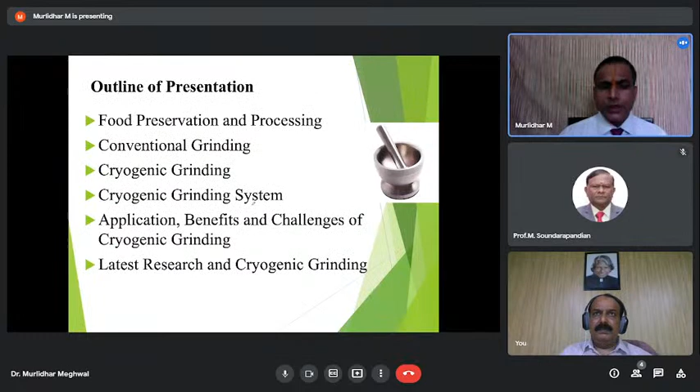So what is the purpose of processing? Why do we process food? One aspect of preservation is to extend the shelf life of food materials so that we can keep them for a longer time. Another aspect is to add value to the food materials, make them convenient, or make ready raw materials for making other food products. There are several processing methods: milling, grinding, mixing, separation, extraction, expression. All these are unit operations in food processing.

Here we will mainly discuss the milling process. Different terms are used for milling: grinding, comminution, size reduction. Grinding is a process of reducing the size of solid material by mechanical actions. We apply mechanical force so that bigger materials are brought to a smaller size, like grains: if we grind grains and produce atta or wheat flour, we can make chapati or other bakery products. So bigger materials are reduced by mechanical actions and divided into smaller particles.

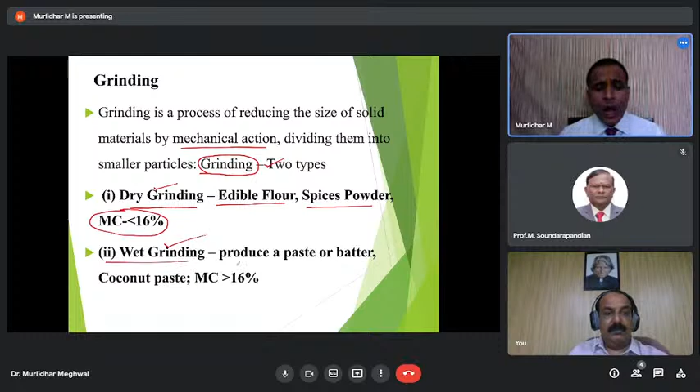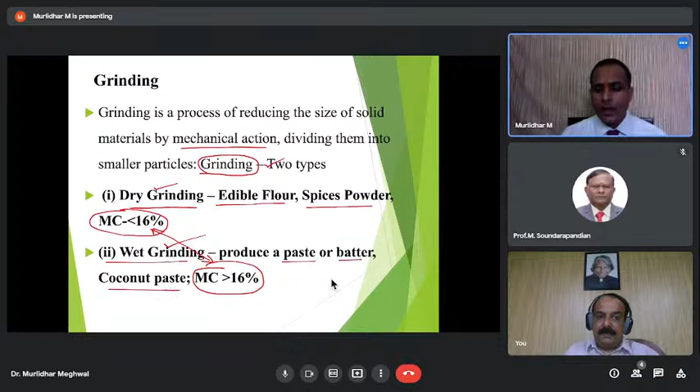The other is wet grinding. In wet grinding, the final product is in the form of paste or batter, and the moisture content is more than 16%. So the main criterion for classifying grinding is moisture content. If it is more than 16%, we call it wet grinding. The final product may be a paste or batter, like the coconut paste we use in South India for making dosa chutney.

Now, what is the application of grinding? Perhaps the most extensive application of grinding in the food industry is the milling of grains to make flour: wheat, ragi, bajra, or rice. These are staple foods consumed by the majority of people, so they need to be milled. So milling or grinding is a major sector in the food industry.

Apart from this, we use grinding in other sectors also, like grinding corn for manufacturing corn starch, or grinding sugar.

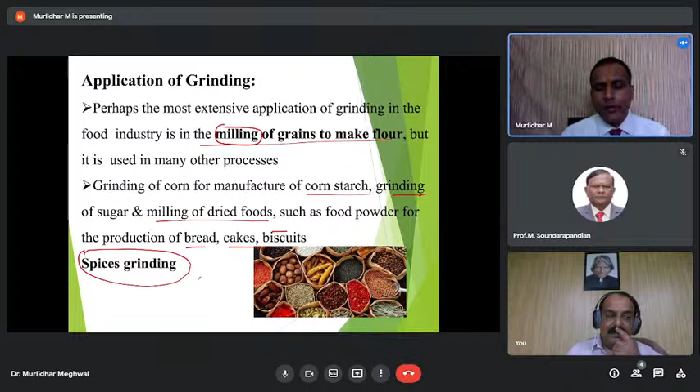Or milling of dried food, such as food powder for production of bread, cake, biscuits, like we use in the bakery industry. Now, spice grinding. This is a huge industry in our food processing. In our day-to-day life, in every home, we use spice in some form or other. So spice grinding is important.

Now, before moving further, for understanding spice grinding, first we'll try to understand the mechanism of grinding. We told the definition of grinding very easily, that we reduce the size of particles from bigger size to small size. But how is it happening? What is the mechanism? In grinding, size reduction is achieved by fracturing the materials. For fracturing materials, we need energy. So we apply force, energy, and with the help of that energy we do the size reduction.

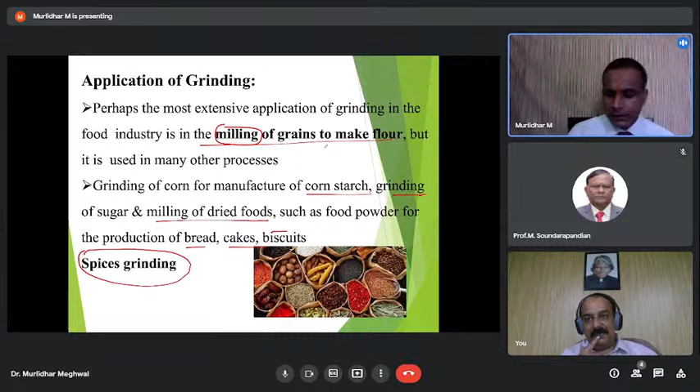You might have seen different grinders, maybe atta chakki. They apply a lot of energy, a lot of force. That is the reason there is a lot of heat generation. For efficient grinding, energy applied to the materials should exceed the threshold. When we apply the force, that force should be more than the maximum force the material can bear. When we cross that limit, we are able to fracture the materials, maybe by a small possible margin. The minimum energy needed to fracture the material, it should cross over that threshold.

When we apply the energy, material is stressed by the action of mechanical moving parts of the grinders. We will see different types of grinders, and then you can see how the different parts and structures do the grinding. Here, time plays an important part in the fracturing process. We have to give sufficient time for getting the required grinding done. This we will see in the hammer mill. The material keeps on rotating until it gets the required minimum size. Only then can it pass through the sieve.

This energy requirement is very important, because how much energy we are applying directly relates with economy and revenue. Our focus is to reduce the energy consumption, and it also relates with the quality of the material. If we apply a lot of energy, there is a lot of heat generation and more damage to the material. So it depends on the hardness of the materials. It also depends on the friability of the materials.

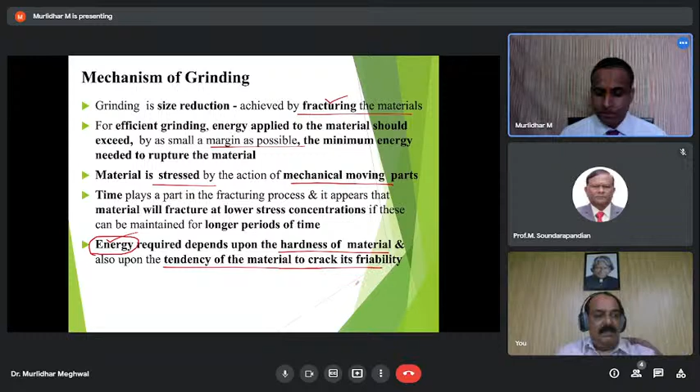Please. I think somebody's mic is on. Kindly mute.

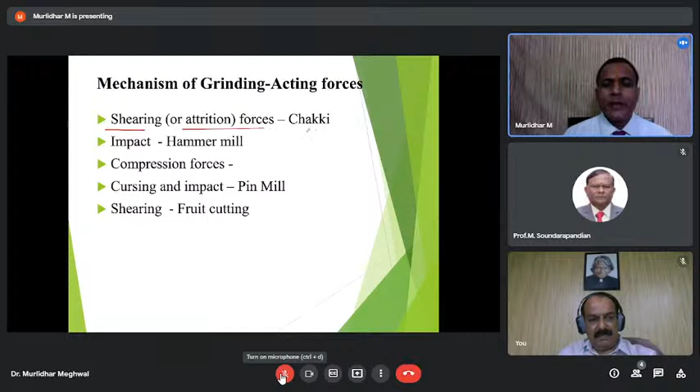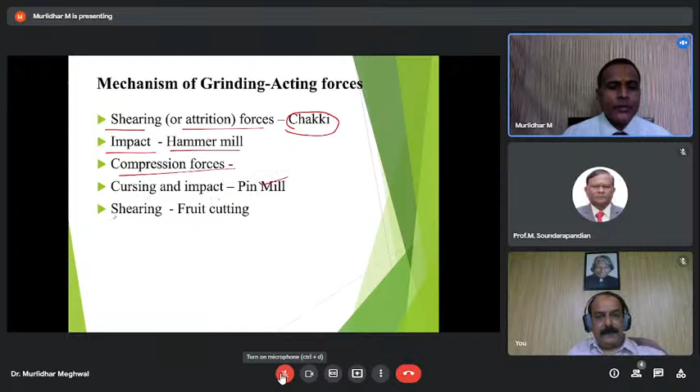So the mechanism of grinding we discuss based on the different types of forces acting on the material. These different forces may be shearing or attrition force, generally in the kind of grinder we traditionally use, the atta chakki. Then impact force, which is in the hammer mill. Then compression force, like when we cut fruits with the help of knives. Then crushing and impact force we find in the pin mill. Then shearing force again you can see in fruit cutting.

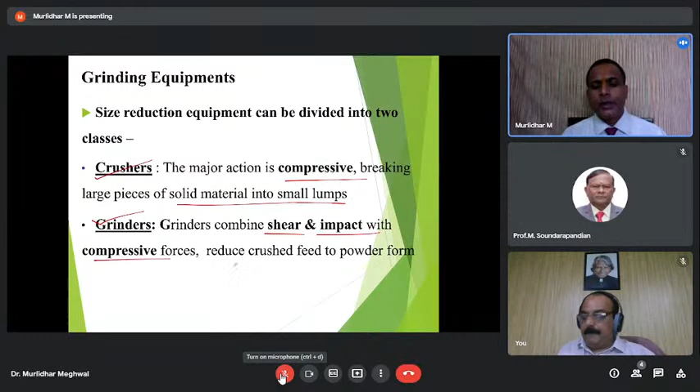Now, what are the different types of grinding equipment we need to get the desired size reduction? Size reduction equipment can be divided into two classes, because this size reduction process is used in other industries also, like mining or ore grinding. They have ores, big rocks, and they want to crush them, make powder, and then process further. The first type of size reduction equipment is crushers. The major action is compressive force, breaking large pieces of solid material into small lumps. The second category is grinders. Grinders use shear force and impact force, and compressive force is also there, and they reduce the feed materials into powder form.

This grinding process people have used since ancient times. We read in Srimad Bhagavatam, a very old ancient scripture, that Lord Krishna appeared on this earth 5,500 years ago. There a description comes that little Krishna, he is God, but he played the role of a human being. Like a normal child, he did a lot of mischievous activities, like breaking the pot and distributing butter to all the monkeys. So being a mother, Yashoda tried to teach him a moral lesson, and the description comes that Mother Yashoda tied Lord Krishna to a mortar and pestle.

It means that at that time also they used these kinds of devices for size reduction, for grinding. In other scriptures also there is a description of festivals like marriage, where ladies come together and grind the turmeric. So people have used this grinding process since ancient times. But with time, some challenges and problems came, and that we will be discussing here.

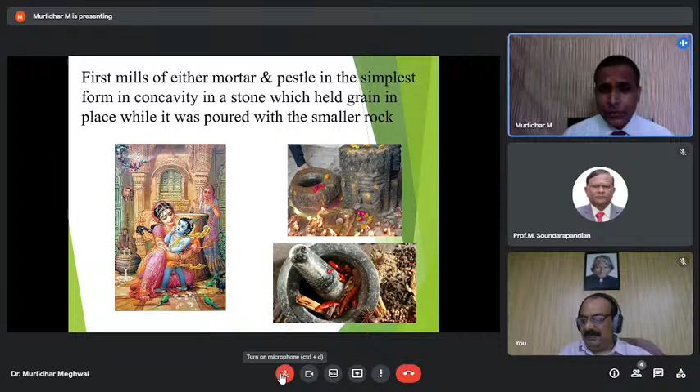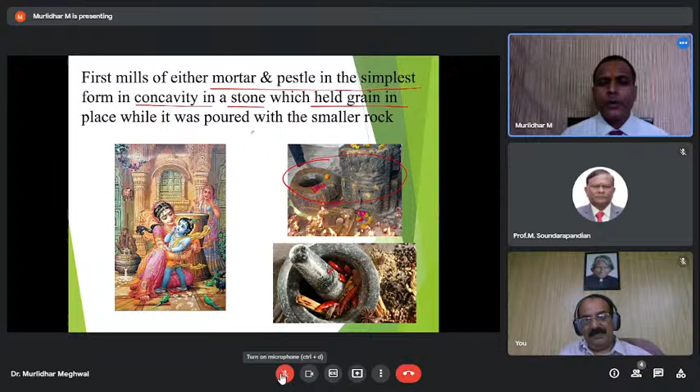So at first they used to use these kinds of mortar and pestle devices, which is the simplest one, which have a concavity in a stone, in which we can put the grains, and then we can do pounding with the help of these kinds of hammers.

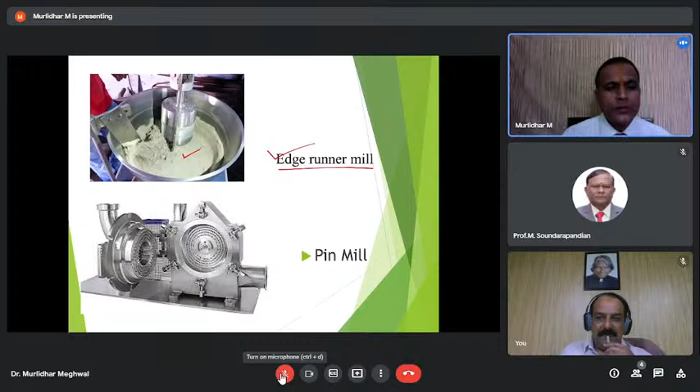Then pin mill. So here you can see this is a pin mill. So there are pins on both sides. One may be in a stationary condition, the other may be moving. And while moving with a lot of force, at high speed, they grind the materials with the help of impact force.

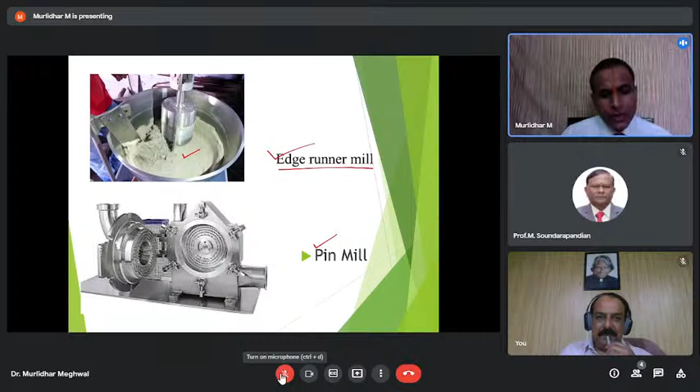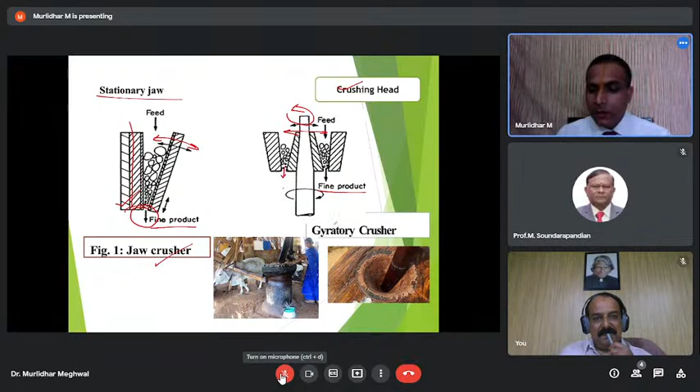Then comes gyratory crushers. So still now, if you go to the towns or village sites, people use this kind. Now they may use it with the help of electricity. Earlier they used bulls or animals, like they have coconuts and they crush it with the help of these kinds of gyratory crushers, and they get oil. So here you can see this coconut oil, and then they store it, and they use it throughout the year. So this is another kind of grinder.

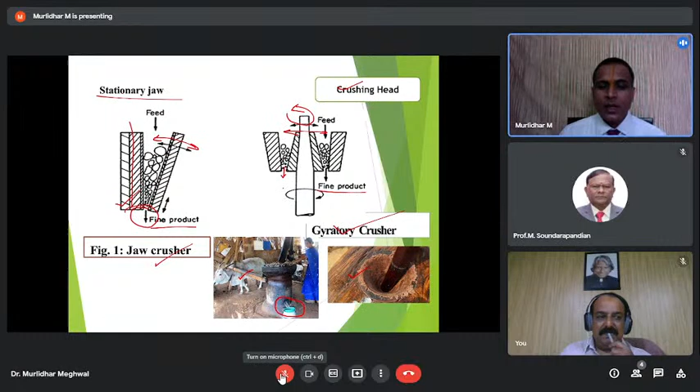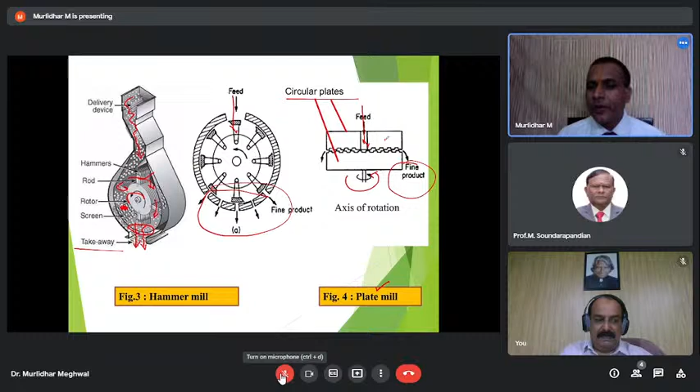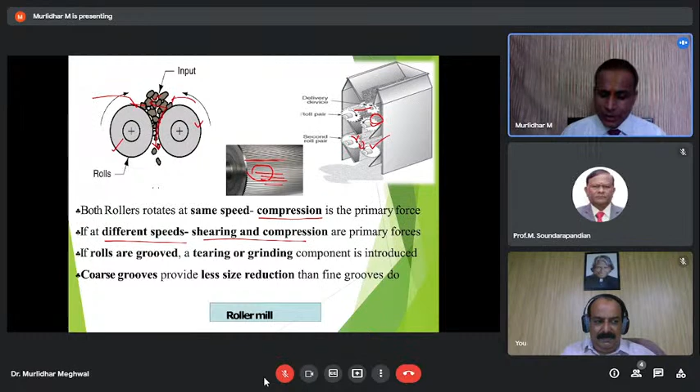If rolls are grooved, like this kind of structure, then tearing and grinding takes place. The coarse grooves provide less size reduction than finer grooves. So if these grooves are very fine, then we can get very fine powder. Here also you can see in starting bigger size grooves, and then it's coming to finer size grooves. So when we reduce the groove size, we get finer and finer size particles.

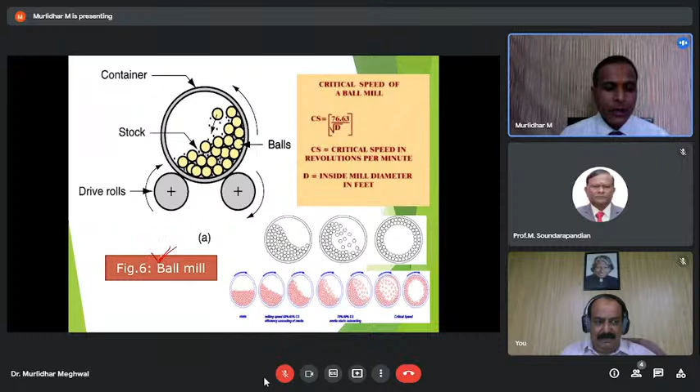Now we want to discuss the ball mill. We have discussed earlier that in grinders the ball mill also we use. So these are the driving rolls. This drives this mill, and we use stocks. So these are the stocks, or these are the balls. So these stock materials, maybe we want to do the size reduction, and outside we have a container in which we contain the materials, balls, everything.

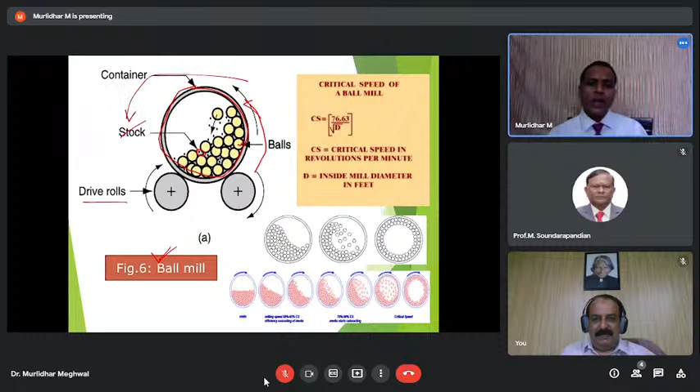Now when these driving rolls rotate, then this grinder starts rotating in this direction. When it rotates, these balls also rotate, and they rise up to a certain height, and then they fall down. So when they fall down on the materials with force, with impact and compression, they grind the materials. So these balls will do the size reduction.

Now, in this grinding process, when we increase the speed, if it reaches a particular speed, then we see these balls will also start rotating along with this container. So the first case is static conditions. Slowly we increase the speed, then the balls start rotating. Here they start falling, and we have increased speed more. So some balls are falling, some balls are rotating along, and in a particular condition, all the balls start rotating along with the grinder. No ball is falling. It means there is no grinding.

So this condition in which all balls start rotating along with the container, we call critical speed. So we have to avoid this critical speed, otherwise we will not get size reduction, and we will keep putting in energy and the grinder will be running. So we have to avoid this critical speed.

So to calculate critical speed, they have done the estimations, calculation, determination. So CS = 76.63 divided by the square root of d. This is the formula to calculate the critical speed. d is the inside mill diameter in feet. It's based on the diameter; accordingly, you have to set the speed. CS is critical speed in revolutions per minute. So we have to avoid this critical speed to get the size reduction.

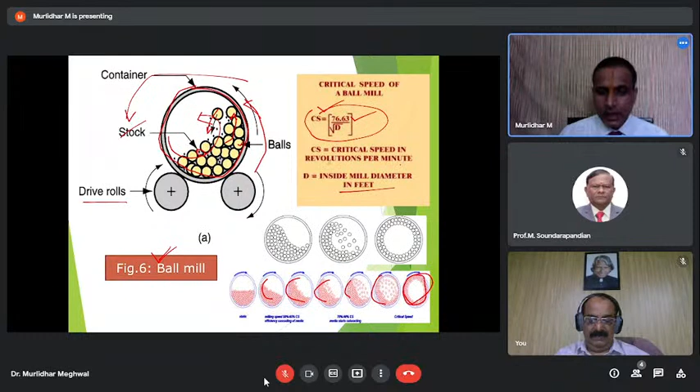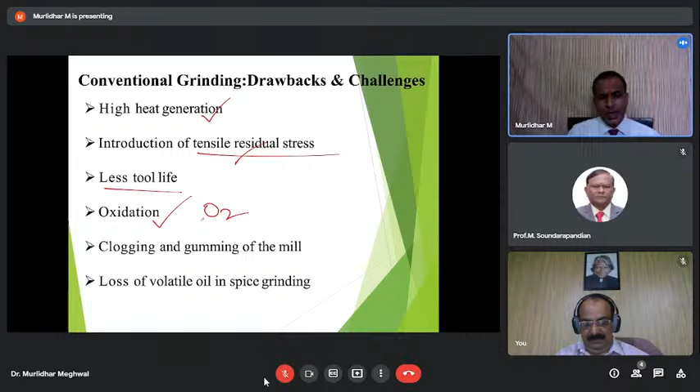Then oxidation. Gases like oxygen are in the atmosphere. When we do grinding, we break the materials and the constituents inside come out. They react with oxygen, and at high temperature, oxidation becomes faster. So this is another problem.

Then clogging and gumming of the mills. When we do grinding, some spices have a lot of oils. Particularly if we take ajwain, it has a lot of volatile oils, and when we try to grind, that oil comes out, and it generates a lot of heat. Due to heat generation, this oil will melt and clog the mills. Lot of oil generation, releasing, and then clogging the mills. Then we cannot do further grinding.

Then loss of volatile oil. Spices have phytochemicals, a lot of useful health-benefiting compounds, and due to this high heat generation, these useful compounds get deteriorated, oxidized, and lost. The spice or food commodity loses its value.

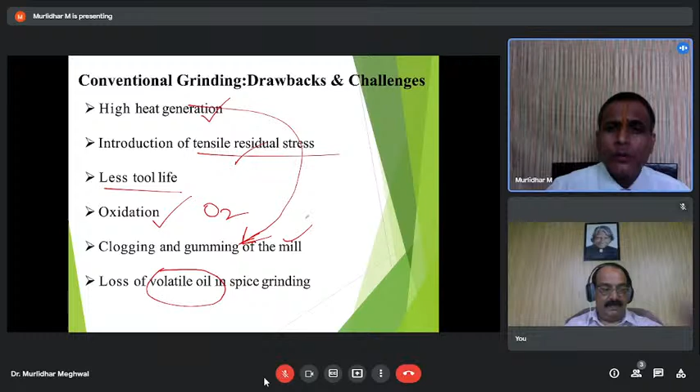So how to overcome this problem? These kinds of problems, as we discussed - high heat generation, tensile residual stress generation, less tool life, oxidation, clogging, gumming, volatile oil loss, discoloration, color also getting changed in the material - to overcome these problems, we come up with cryogenic grinding of spices.

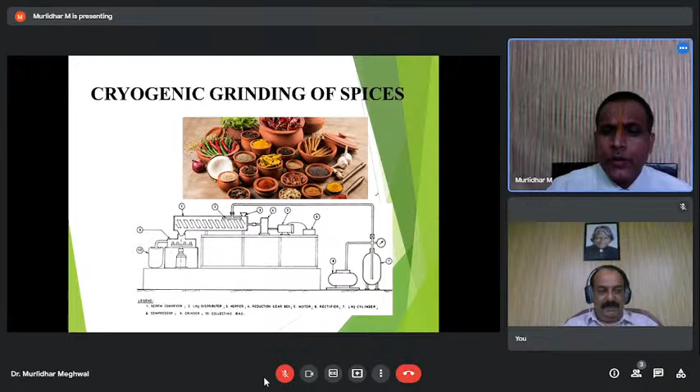This is the cryogenic grinding system developed by Professor Tridip Kumar Goswami at IIT Kharagpur and Dr. K.K. Singh, the director of CAE Bhopal. They have worked on it and developed this cryogenic grinding system. We will try to understand what the cryogenic grinding system is. Before that, we will discuss some fundamentals required to understand the cryogenic grinding process.

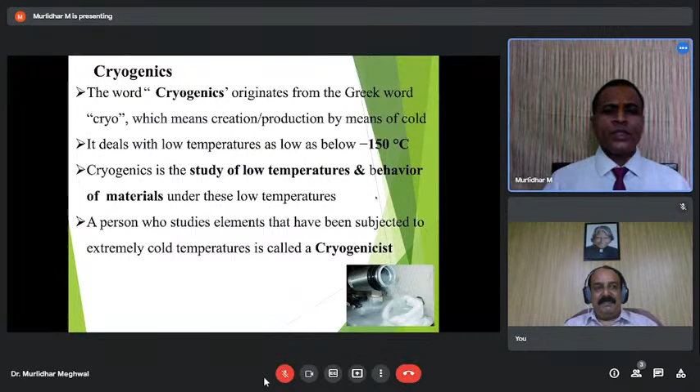First of all, this word cryogenics - what does it indicate? This word originates from the Greek word cryo, which means creation or production by means of cold. So these cryo words deal with cold. The cryogenic branch particularly deals with low temperature processes.

How low? It may be as low as minus 150 degrees Celsius or minus 196 degrees Celsius. Cryogenics is the study of low temperature and the behavior of materials under these low temperature conditions. Because we use this approach in several industries.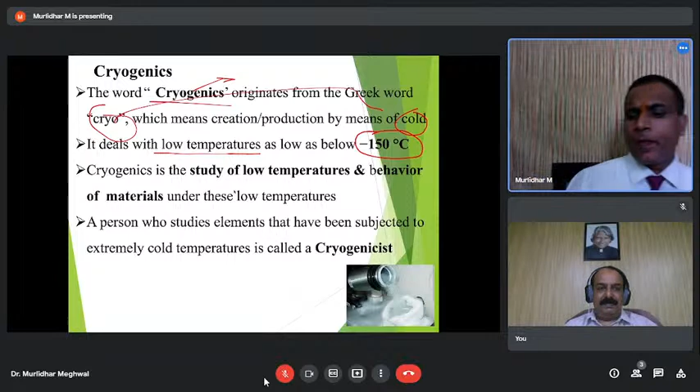For example, rubber industry, aerospace industry, similarly in the medical field. That is why it's very important, and we have separate departments for this science, this discipline. Like in IIT Kharagpur, we have a department of cryogenics. There are all kinds of processes we read about in detail.

A person who studies elements subjected to extremely cold temperature is called a cryogenicist. So the person who works in this field, who is an expert in this field, is a cryogenicist.

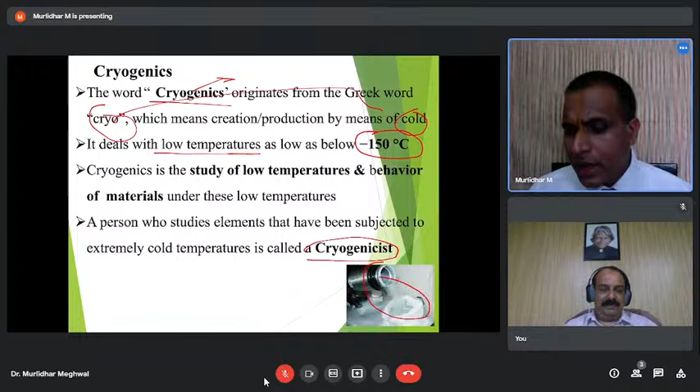This is liquid nitrogen. You can see it being poured on materials. We will be discussing here why we use nitrogen and why it is so important. There are several cryogenic liquids we can use - nitrogen is one of them. We can use helium, neon, argon, krypton, hydrogen, methane, or liquefied natural gas, or maybe more.

Here, most importantly, liquid nitrogen we use - commonly we use this one. Why do we use it? Because in nature, plenty of nitrogen is there. If we compare with helium, very less. If we start helium extraction, it will be very expensive, even though it is also an inert gas.

Now when we extract and try to store these kinds of gases, when we compress and extract it, it has a lot of vapor pressure. So the earlier scientists faced problems for storage. So they developed certain devices to store these kinds of liquids - we call it a Dewar Flask. The Dewar Flask has very good insulation, and different kinds of cryogens we can store in it.

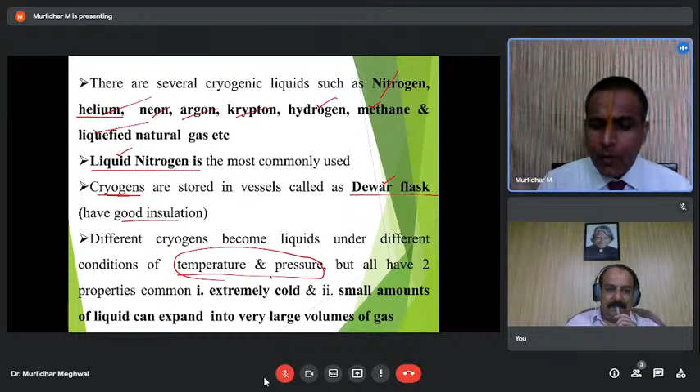It means if we try to compress them, extract them, they are very cold. But as soon as they get heat, they try to evaporate. They will try to occupy more and more space. And if we are not able to handle this properly, it may lead to a serious accident.

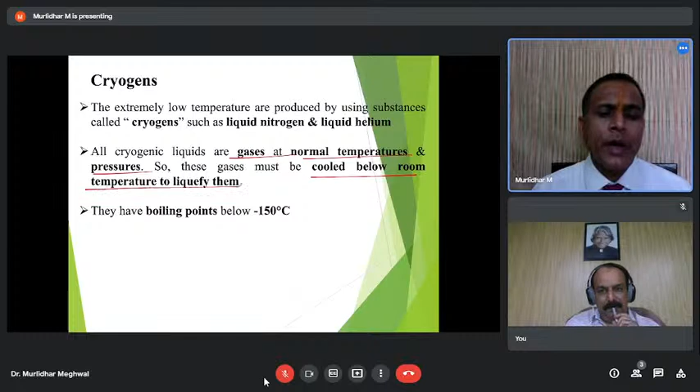The extremely low temperatures are produced by using substances called cryogens, such as liquid nitrogen and liquid helium. All these cryogenic liquids are gases at normal temperature and pressure, so they must be cooled below room temperature to liquefy, and then we can cool them further.

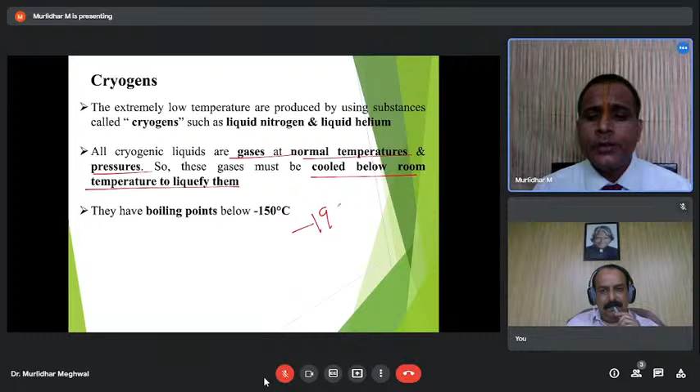Liquid nitrogen has a boiling point of minus 196 degrees Celsius, so you can imagine how cold we are bringing these materials to. Nitrogen gas makes up a major portion of our atmospheric gases, about 78.03% by volume. Another good thing with liquid nitrogen is that it is inert, colorless, odorless, non-corrosive, and non-flammable.

These properties help us use this gas in food. For example, it is colorless and inert, so if something used in food gave color, that would be a problem. It's odorless, so when we use liquid nitrogen for cryogenic systems, our interest is that it should not give any odor, because we want the food material to retain its own natural odor. It is also non-corrosive and non-flammable. These unique properties of nitrogen make it a very good candidate for use in food, cryogenic grinding, and food processing industry. Even beyond cryogenic grinding, liquid nitrogen is used for packaging purposes also.

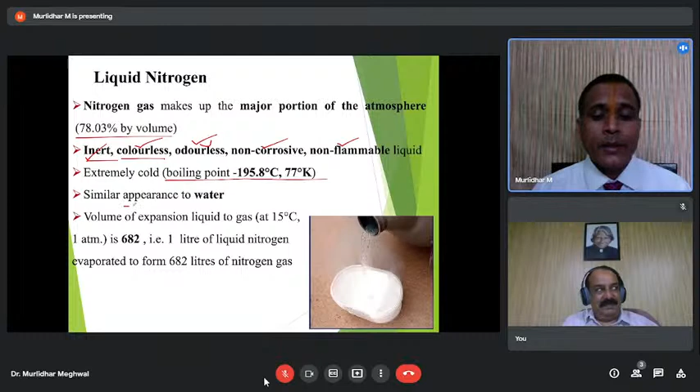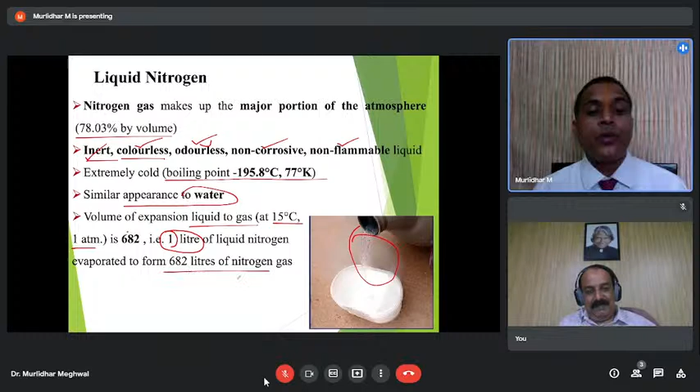This is extremely cold, with a boiling point of minus 195.8 degrees Celsius, and when cooled it appears just like water. Regarding the volume of expansion from liquid to gas, at 15 degrees Celsius and 1 atmospheric pressure, if we take 1 liter of liquid nitrogen, it expands into 682 liters of nitrogen gas. You can imagine how much volume it needs, which is why we need a very good container to store it.

It has very good insulation. They have developed a vacuum inside a vacuum, so there is no heat transfer by conduction or convection, and it has silver surfaces, which is why this container is quite expensive. It can be used for both hot or cold substances to store, since our basic idea is to avoid any kind of heat gain or heat loss.

So the liquid nitrogen or cryogen storage equipment was invented as the Dewar Flask. He was also the first man to liquefy hydrogen.

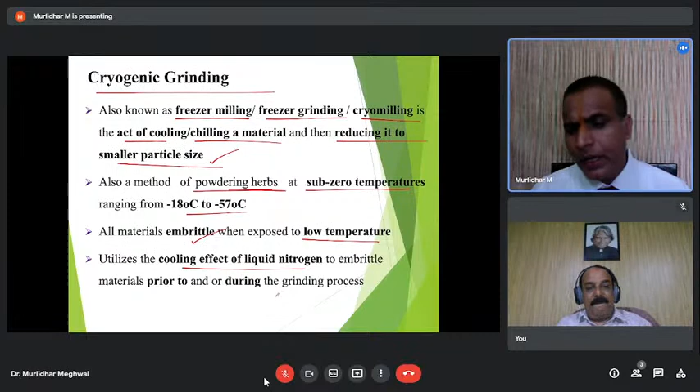It utilizes the cooling effect of liquid nitrogen to embrittle materials prior to and during grinding. Both processes can be done: pre-cooling or pre-chilling before grinding, or supplying liquid nitrogen during the grinding itself. A normal grinding process that does not use a cooling system can reach up to 93 degrees Celsius or 200 degrees Fahrenheit, a very high temperature. Such high temperature leads to reduction in volatile content and heat-sensitive constituents of the herbs and spices.

So to overcome these problems, we come with the cryogenic grinding process, which does not damage or alter the chemical composition of the plant materials. Materials which are elastic in nature, having low melting points, low combustion temperature, sensitive to oxygen - these kinds of material also we can easily grind in cryogenic grinding system.

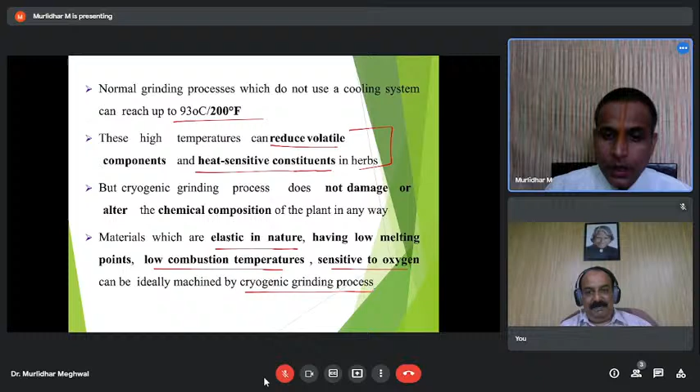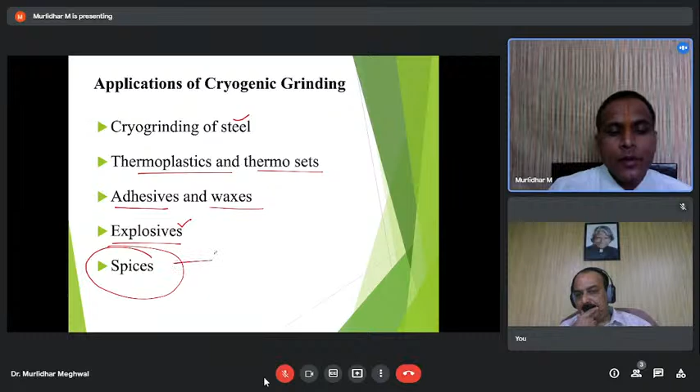There are several applications given in literature, and we can see different industries use this cryogenic grinding system. They use cryo grinding for steels in metal industry, thermoplastic and thermoset, in rubber industry, for adhesives and waxes, for explosives, in aerospace, and particular application in spice industry that leads to our food processing sectors, which we will be discussing.

Spices are most important constituents of our Indian food. All Indians like very spicy food. We use lot of spice. We are blessed by nature that we have so many different climatic conditions in India, and we produce a lot of spices.

Like in Rajasthan, Ajmer side, we are an arid zone, so lot of cumin, coriander. Whereas in Calicut, Kerala, very good condition for black pepper, turmeric growing. And if we go northeast, there is a lot of organic turmeric, lot of spices we produce.

So we use these spices not only in our house, we use in hotels, restaurants, and food processing industry. Not only that, we export a lot of spice. So in history also, from decades back, foreigners used to come for spice trade.

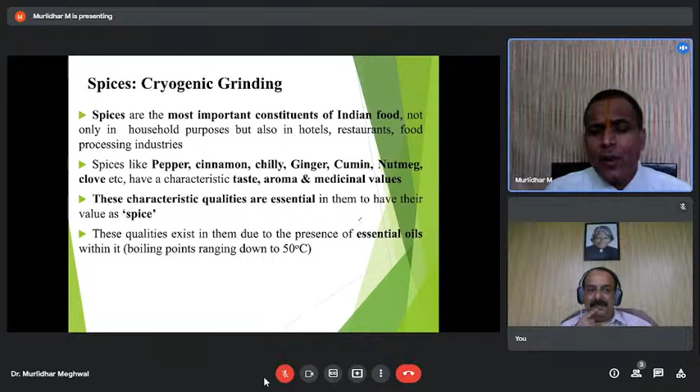The spices, particularly like pepper, cinnamon, chili, ginger, cumin, nutmeg, clove - they have characteristic taste and aroma, and they have medicinal value, very important.

So they give this taste and specific aroma to the food, then people like it, and they also give health benefits. That is the reason that in this corona situation, people at home use a lot of kada, and in that they use a lot of spices.

So these characteristic qualities are very important in terms of their spice values. These qualities are inherently present due to the essential oils or volatile oils, and these volatile oils get affected by the temperature when we go beyond 50 degrees Celsius.

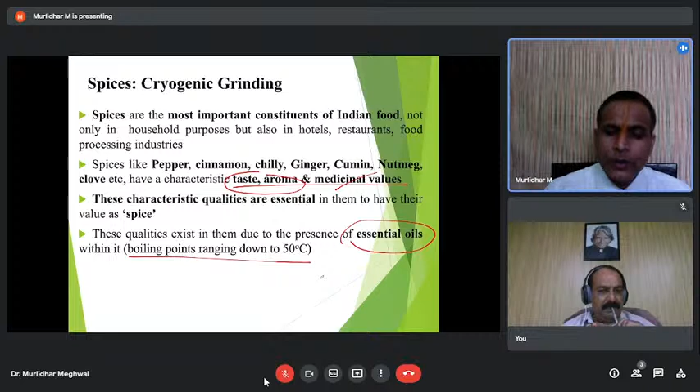As we already discussed some of the problems, again we are discussing some of the problems with our conventional grinding process. One is loss of essential oil or volatile oil due to high temperature.

This applied energy gets dissipated in the form of heat, and this produces more than 99% wastage. Whatever application of heat energy we do, energy goes as waste in the form of heat, noise, friction. Only a very small amount we actually use, other goes as waste.

The temperature in the grinding zone rises more than 90 degrees Celsius, and this is the reason for loss of essential oils, whose boiling point is near 50 degrees Celsius, and this leads to inferior quality of ground products. It reduces the quality of the product.

Then clogging and gumming of the mills. Some of the spices discussed like nutmeg, cloves, cinnamon, ajwain contain high levels of fats, and when we grind it at high temperature, it releases its oil so that clogs the mills.

Some of the spices like capsicum, chili have high moisture content, so that also can lead to the clogging or gumming problem. Due to this clogging and gumming, one is the problem in operation, and the other problem is that it affects the quality of our products.

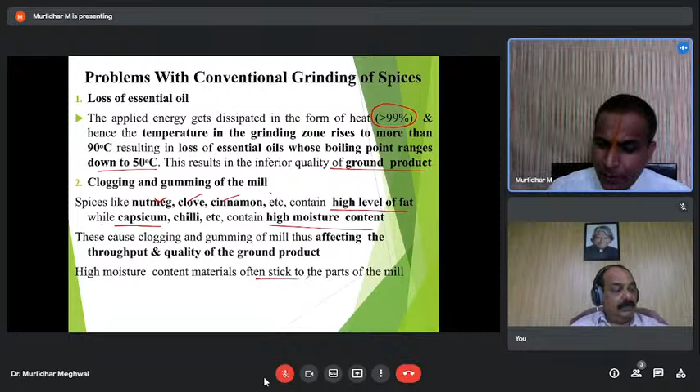So these high oil content materials or high moisture content materials will stick to the parts of the grinder when we use the conventional method. Oxidation and related degradation is another problem due to this intimate cyclone effect of the air in the vicinity of the grinding zone. These aromatic substances in the material oxidize and lead to rancidity, oxidative rancidity.

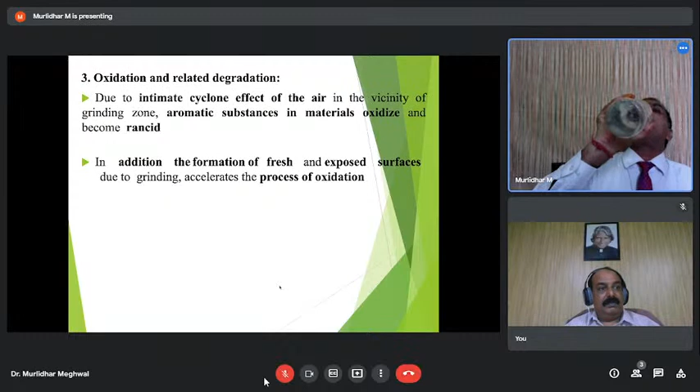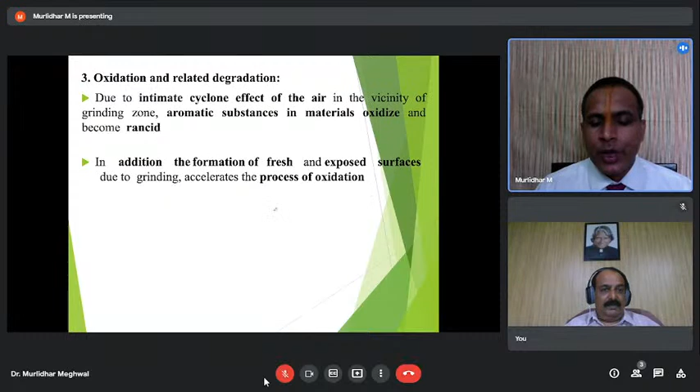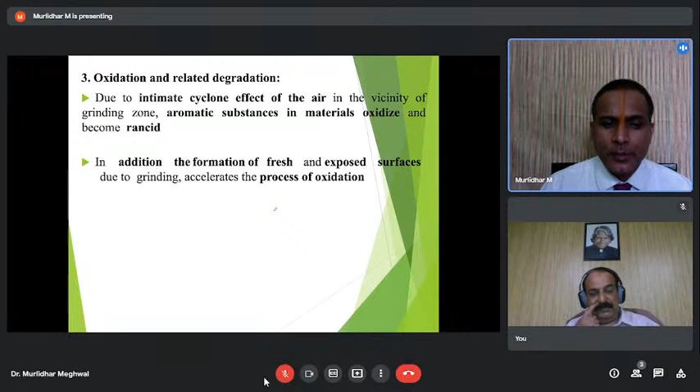Other reason is fresh and exposed surfaces. So when we do the grinding, we increase the surface area of the materials. Because of size reduction, surface area gets increased and more surface gets exposed to oxidation. So the oxidation process becomes more.

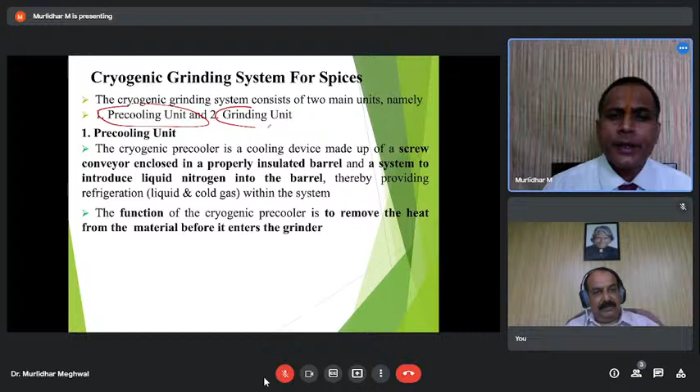Now, to overcome this problem, this cryogenic grinding system for spice we are discussing now. So the cryogenic grinding system consists of mainly two units. First is pre-cooling unit, which is before grinding cooling, and the other is the grinding unit, which we use during the grinding.

So, in the pre-cooler there is a device which has an arrangement of a screw conveyor enclosed in properly insulated barrels. You will see it in the grinder system, and it has a system to introduce liquid nitrogen into the barrel. So we will find an opening like this, from where we can apply the liquid nitrogen, and then it will have that spiral moving thing, so it will take the materials to the grinding zones.

So when we apply this liquid nitrogen, it gives the refrigeration, the chilling and cooling effect to the system. The function of the cryogenic pre-cooler is to remove the heat from the materials before they go into the grinders. So it consists of this screw conveyor assembly as we discussed, and it also has an air compressor. This liquid nitrogen Dewar system is attached to that, and then it has this power transmission arrangement, and then control panels to reduce the temperature of the seed below its brittle point.

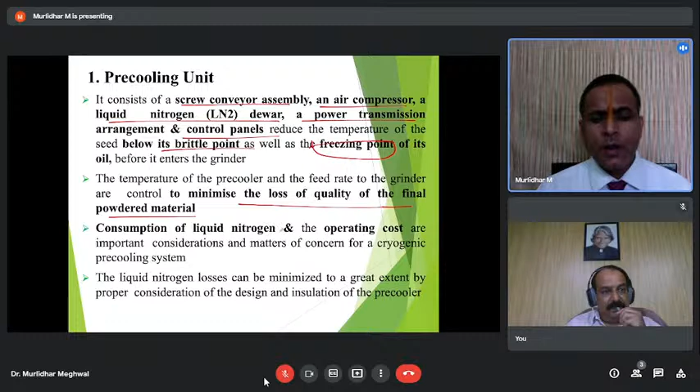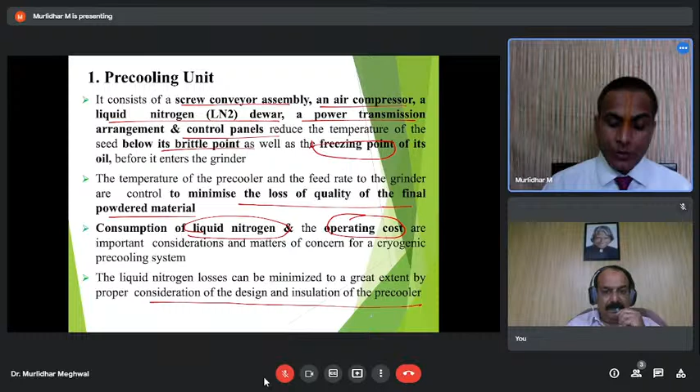Consumption of liquid nitrogen and operating cost are important considerations because this liquid nitrogen is expensive, and for operation we need energy, that's also expensive. The liquid nitrogen losses can be minimized to a great extent by proper consideration of the design and insulation of the pre-coolers. So we should design properly so that the minimum loss of the materials is there.

So there are different engineering considerations we have to take into account for the development of these kinds of grinders. First is retention time: how much time we need to keep the materials in the grinder. We have to optimize it. Then appropriate insulation. Grinders should have appropriate insulation so that they will not lose heat to the surrounding ambient conditions. Then dismantling and cleaning should be easier. We should be able to easily open it and clean it. Then cool-down losses should be reduced by keeping the machine size and structural components to a minimum.

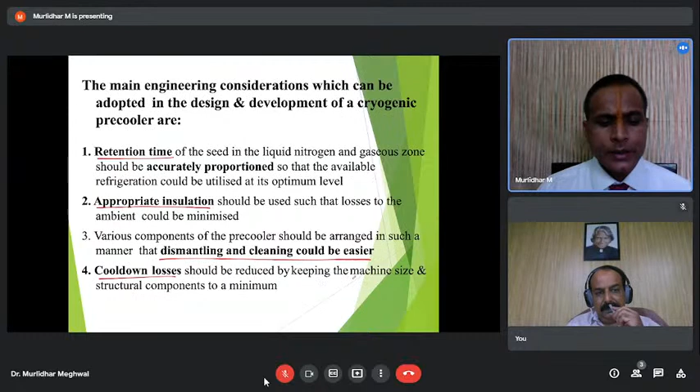So this is the unit. You can see here we apply the liquid nitrogen and then the pre-cooled materials or spice which is to be ground, and this is the spiral structure. So it goes inside to the grinding jar. The operation of grinding is performed by impact and attrition forces, and this is operated by electric motors, something like this. Then the ground powder we can collect at the outlet. So we have an outlet arrangement where we can collect the ground powder.

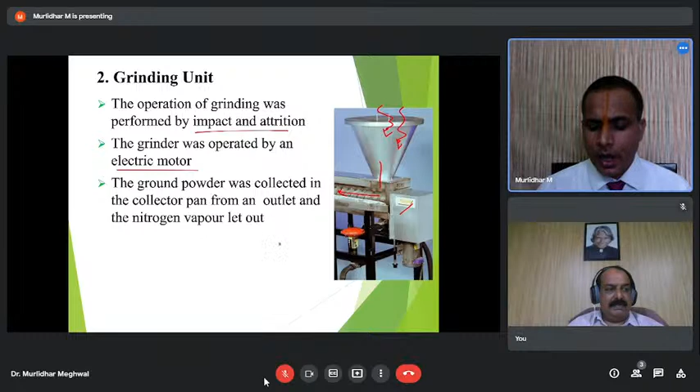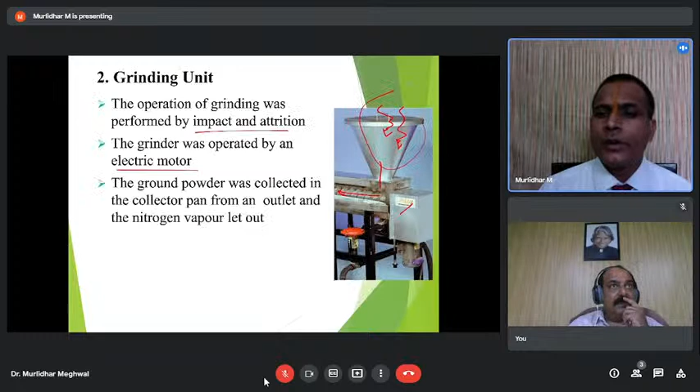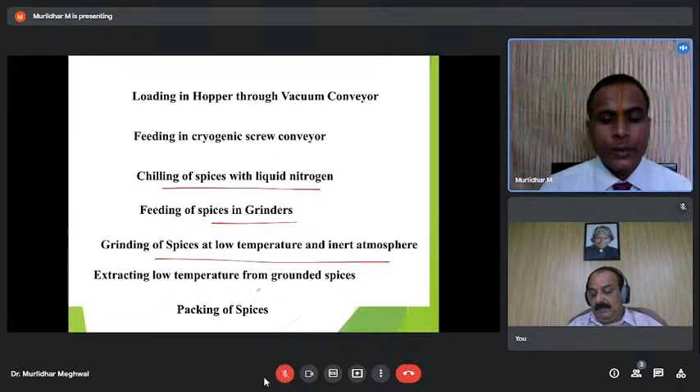So this is a flow chart. First we load the hopper through the vacuum container conveyor. So we have this kind of hopper structure. Then we have feeding into the cryogenic screw conveyor. So from the hopper it will be taken to the screw conveyor. Then chilling our spice with liquid nitrogen. From the other side we apply the liquid nitrogen so that we do chilling. Then feeding our spice into the grinders, and grinding our spices is done at low temperature and in an inert atmosphere, and then we bring it to room temperature, and finally we do the packaging of the spices.

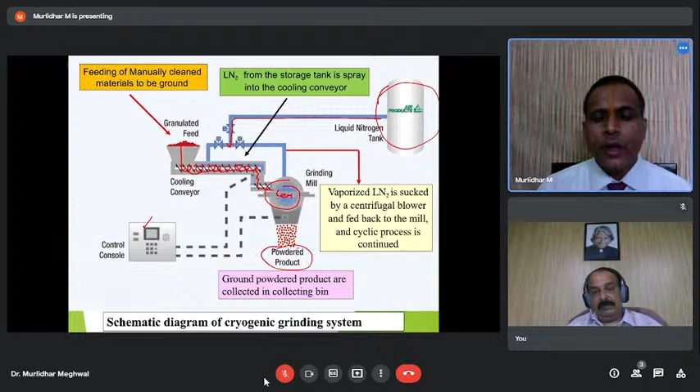Now, what is the advantage of these grinding techniques? High retention of volatile oils due to lower operating temperature. These volatile essential oils we can retain closer to the original level. The prevention of oxidation and rancidity: the heat developed during the grinding will be absorbed by the liquid nitrogen and converted into vapor, and it gets eliminated, and the possibility of oxidation is reduced.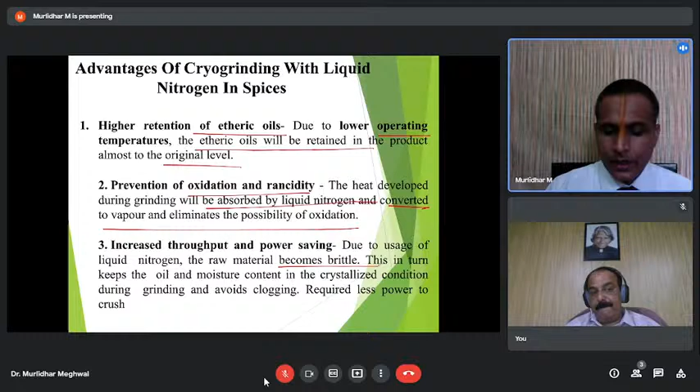Then increased throughput and power saving: due to usage of liquid nitrogen, materials become brittle and need less energy for the grinding, so we are able to save some power. Then finer size particles. We get very fine size particles because there is no clogging and materials are brittle. Then reduction in microbial load. By cooling with liquid nitrogen, some bacteria become dormant. Some bacteria cannot survive at very low temperature, like minus 150 degrees Celsius. So this microbial load we can also control.

Then possibility of fine grinding of difficult spices. By use of low temperature, raw material becomes brittle, and it is easy to grind the fibers by shattering. Fibrous spices like ginger can be ground easily. Those fibrous materials are difficult to grind, but when they become brittle, they can be converted to fine particles. Then high oil content spices like nutmeg, ajwain, we can also easily grind. We can also grind green chilies, so there will be no pre-drying, and we will be able to retain them in their natural condition.

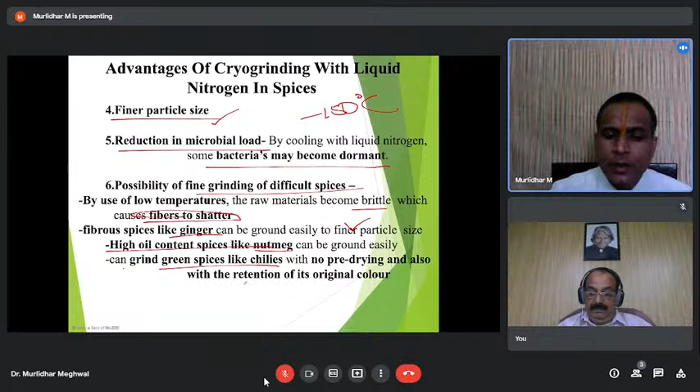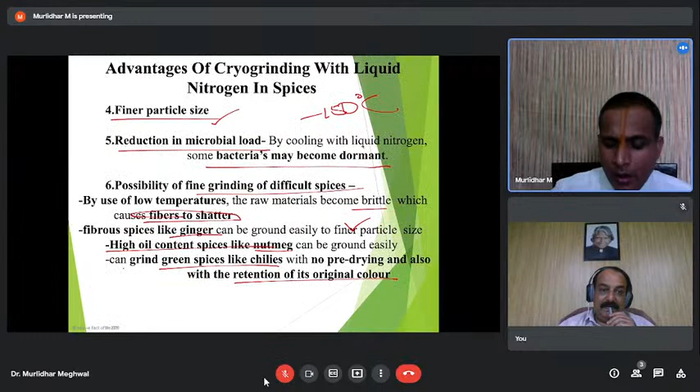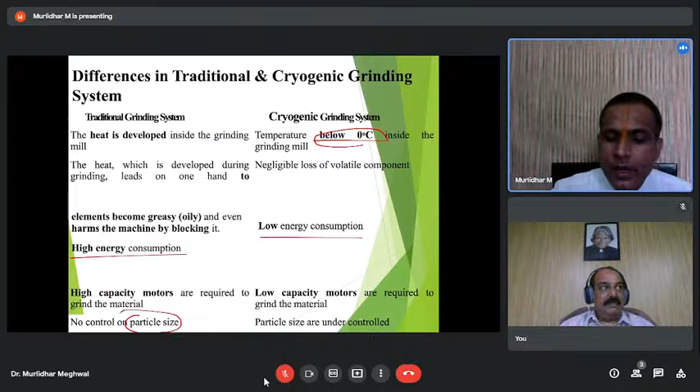If we compare the traditional grinding system and cryogenic grinding system, in the traditional system heat is developed inside the grinding mill, and that heat leads to loss of the quality of the spice. Whereas in cryogenic grinding, the temperature is below 0 degrees Celsius, and the effect on quality is less. In conventional grinding there are problems like blocking and gumming due to oily materials; those problems are not there in cryogenic grinding. Another challenge in traditional grinding is high energy consumption, but here energy consumption is less. Traditional grinding requires high capacity motors, but here a low capacity motor works. There, control of particle size is difficult, but here we can control it nicely.

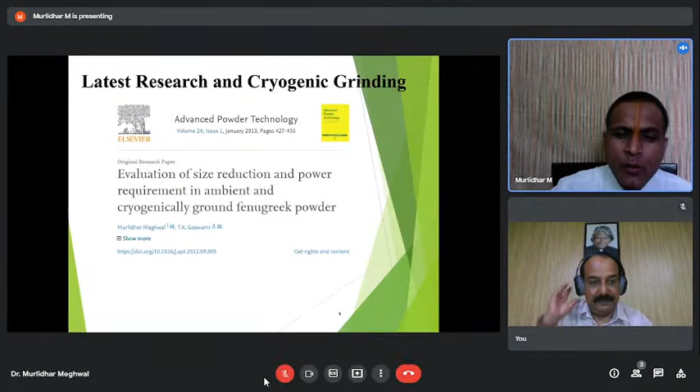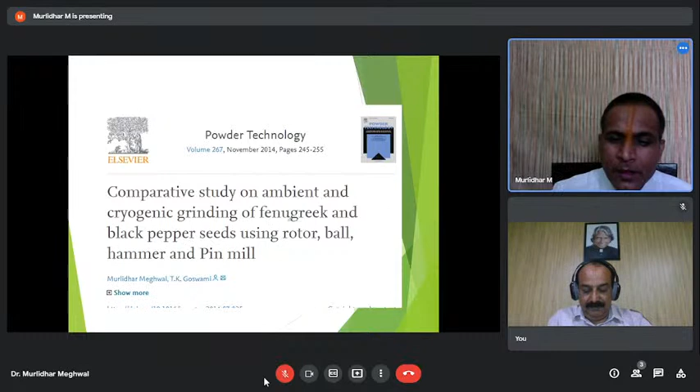If somebody wants to read it in detail, they can refer to this paper published in Advanced Powder Technology, Evaluation of Size Reduction and Power Requirement in Ambient and Cryogenically Ground Fenugreek Powder. Different calculations are made of how much power is required in different grinders. This is another paper in Powder Technology, where different grinders have been taken and their power consumption for two spices, fenugreek and black pepper, has been discussed. If somebody is interested, they can study it in detail.

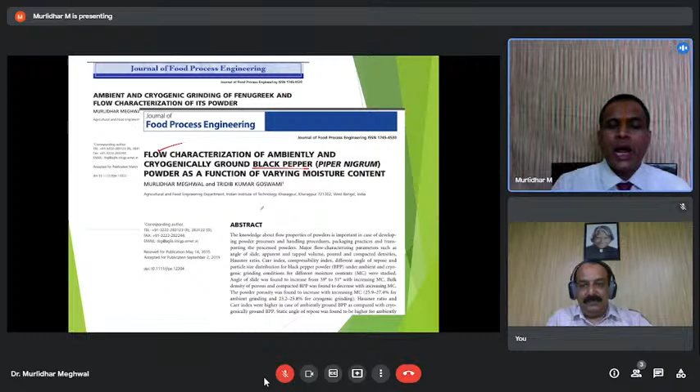Here is another study published in the Journal of Food Process Engineering. This paper particularly talks about the flow characterization of ambient and cryogenically ground black pepper powders, how the properties of conventionally ground and cryogenically ground powders are affected. Somebody interested can go through those papers.

Now, there are some challenges or health hazards related with cryogenic liquids. Skin and eye hazard: cryogens are extremely cold, and they can cause instant severe frostbite or problems to the eyes. So when handling them, one should take proper care, use goggles and proper hand gloves. Then cold embrittlement: at cryogenic temperature many materials such as rubber, plastic and carbon steel become so brittle that very little stress can break them. This needs to be taken care of, otherwise it can be a hazard.

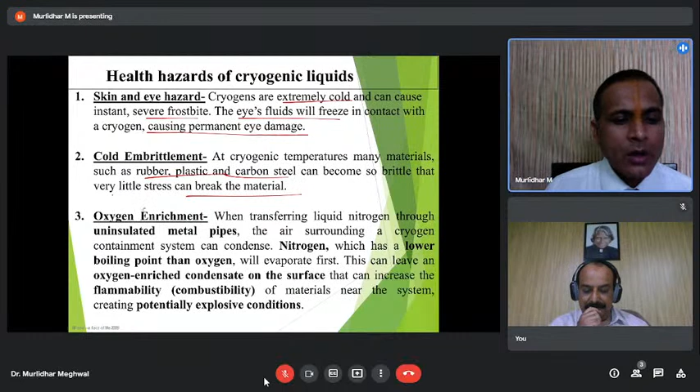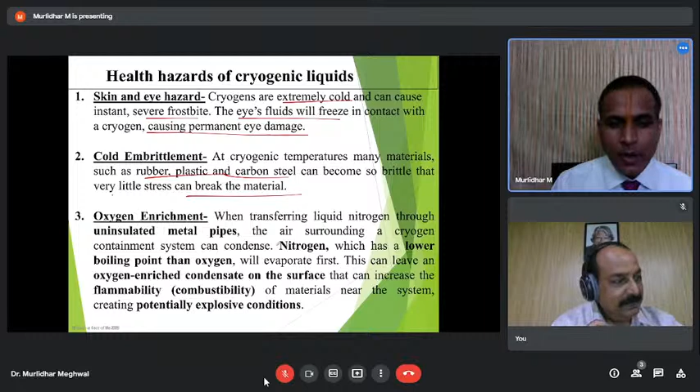Then oxygen enrichment. When transferring liquid nitrogen through uninsulated metal pipes, the air surrounding a cryogenic system can condense. Nitrogen, which has a lower boiling point than oxygen, will evaporate first. This can leave an oxygen enriched condensate on the surface that can increase the flammability of materials near the system, leading to a potentially explosive condition. So precautions should be taken.

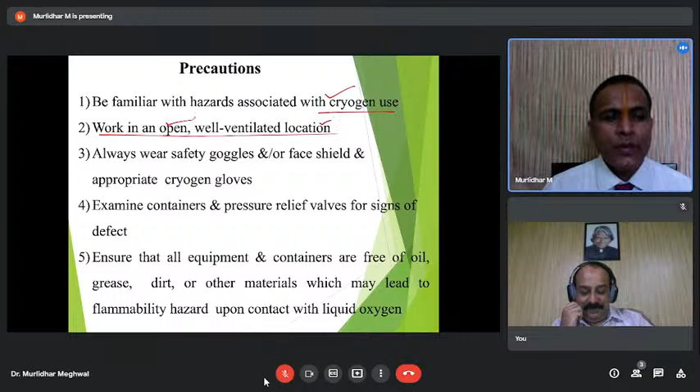So what precautions should we take? We should be familiar with the hazards associated with the particular cryogen. Work in open and well ventilated conditions. We should always wear goggles, face shield, and appropriate gloves. Then we should examine the container and pressure relief valve for signs of defects, and ensure that all equipment and containers are free from oils, grease, and dirt, because oil and grease can be flammable materials and a fire hazard.

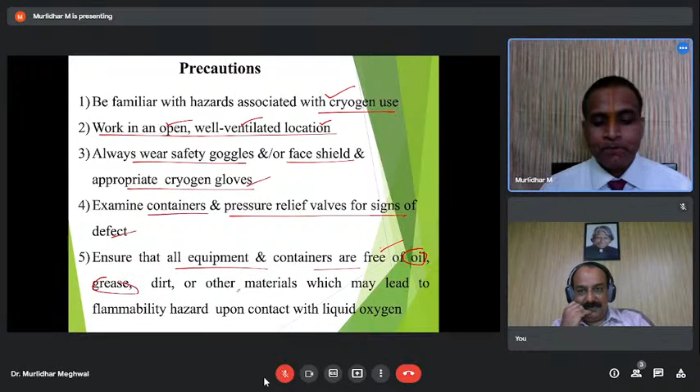So we should take care. So the conclusion is that as the prices of energy and raw materials rise, the concerns for environment make safe waste disposal difficult and costly. So resource recovery becomes a vital matter for today's business. It's very important to have minimum energy input and get the maximum output. Another concern is quality of that material.

So quality and cost. So this cryogenic grinding technology efficiently helps us to grind the materials with the best quality, very near to the natural one. So it employs a cryogenic process to embrittle and grind the materials to achieve a consistent particle size. As per our requirement, we get the particle size range.